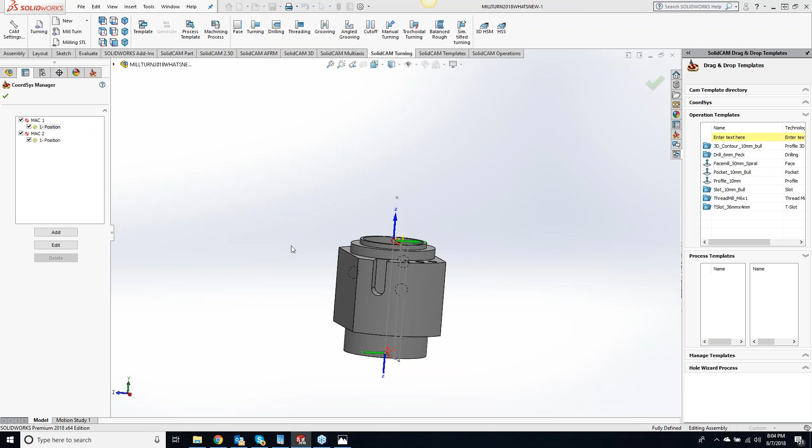So I've got a coordinate system, one on each side here, and this is going on an Integrex machine. So here's my op1, and then op2 will get transferred over to the sub spindle for you guys. So how do we get that set up, letting the machine know and letting the SolidCAM program know that it's working on the main spindle for op1 and the sub spindle for op2? Well, let me go to my fixtures here.

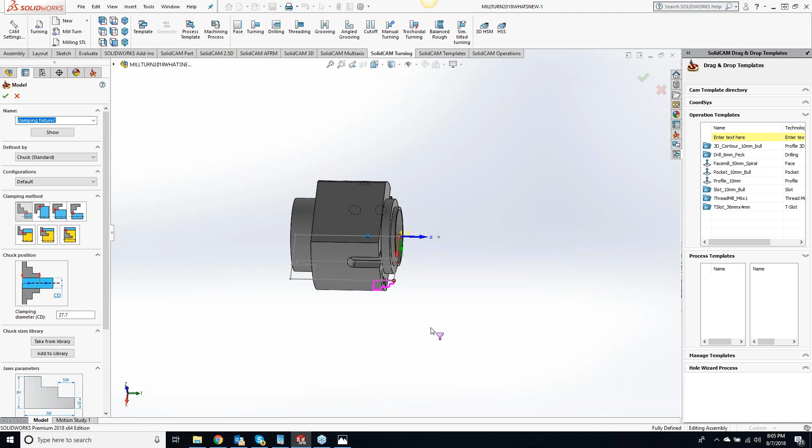Before, we used to have a distance down here for where you want those clamping jaws held on the part. It used to be right here, and they've taken that out and added it into the setup for you. So you can see my jaws are right on the edge of the part, but obviously that's not where I want it. I want it hanging back here. So what we've done is incorporated the fixture along with the setup and the machine.

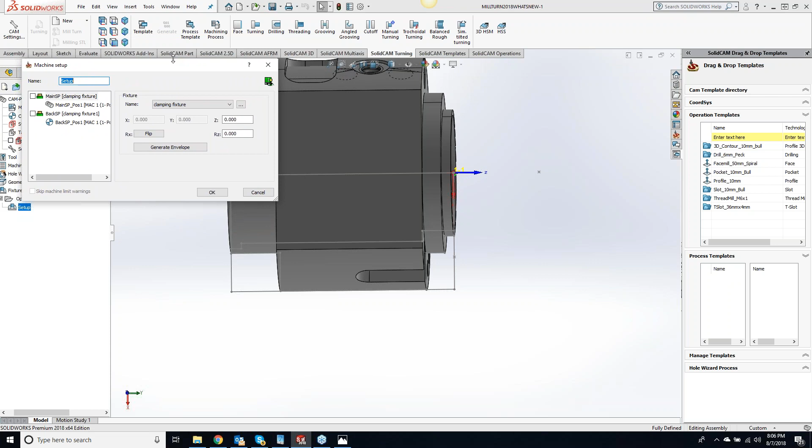Okay, if I haven't confused you yet, I'll show you what I mean. So here's the new setup. It looks a little different than 17 and 16, but it's very easy to use. First thing I like to do when you come into your machine setup is turn on your machine. This will allow you to see your part, the machine, and everything going on.

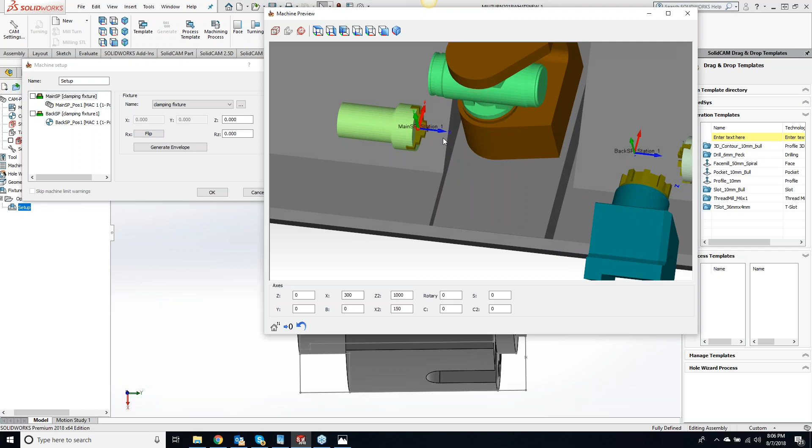So for our first one, we're working on the clamping fixture. Remember how we couldn't define where it was clamping onto the part? Let's zoom in here and get a straight down view. And here is where I can adjust where those fixtures are located. So if I just highlight that and roll my center trackball...

You can see the clamps coming out from the jaws of that machine. I'm just going to keep going here, and get them flush or close to flush with my jaws. I got a little delay here. Okay, so now my clamps are flush with it.

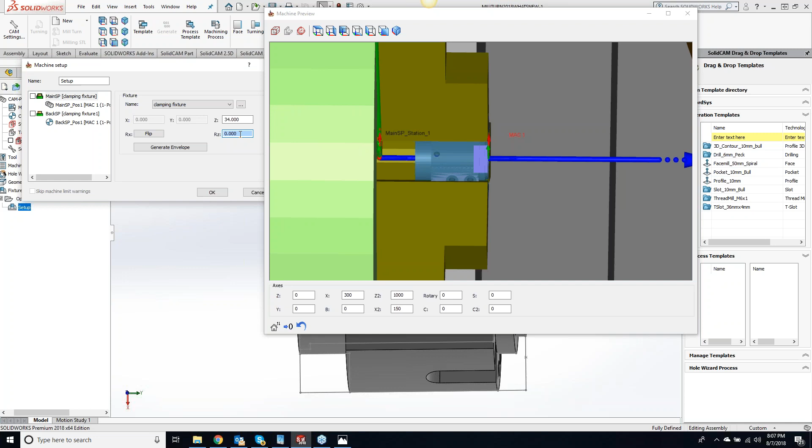And you can see I'm clicked on my clamping fixture right here. Now what I want to do is line up my jaws. So I can come down to the rotational here and rotate my jaws so they're lined up with the jaws of the machine here.

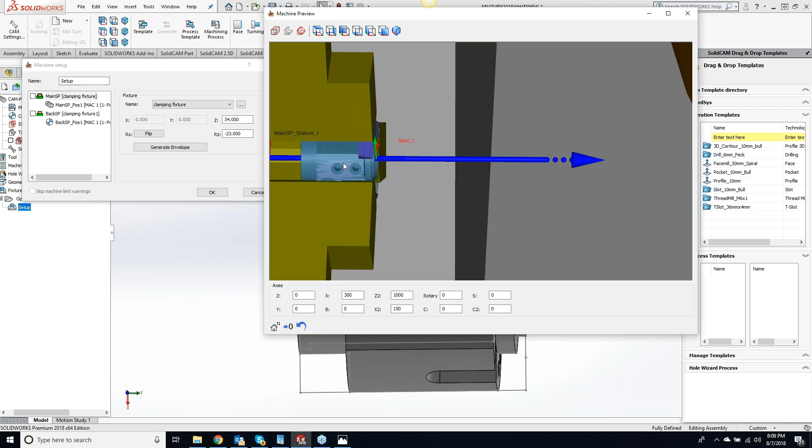Either my trackball is really slow or come on. Yeah, if you know the angle you're looking for, you can also type that in as well. Suppose I could just type in, probably wouldn't be 45 degrees. All right, that looks about good.

So now we've got our jaws completely lined up with our jaws on the machine. So now we can come over to the main spindle here, and now I can tell it how far I want that part sitting out.

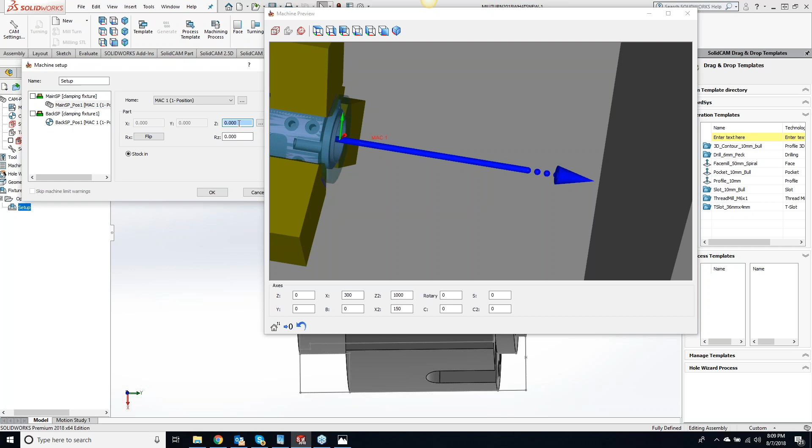Oop, going the wrong way here. So now I can come in here, and this is where I'm locating my jaws, kind of where it used to be in the fixture before, and where do I want to clamp onto that part. And we'll go right to the edge, right there. Oh, one too many.

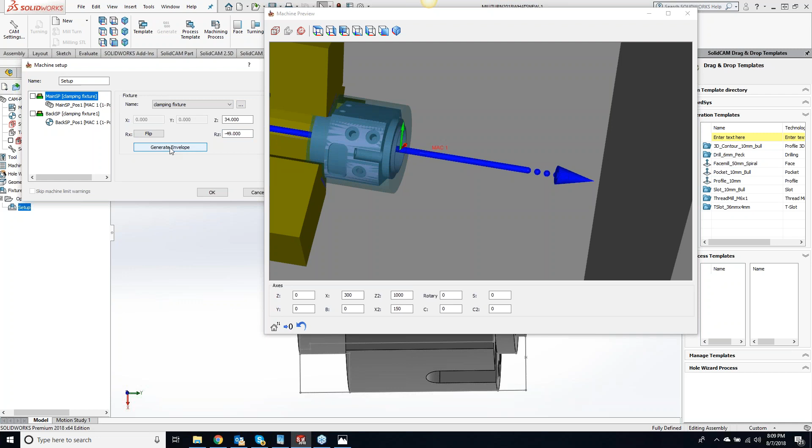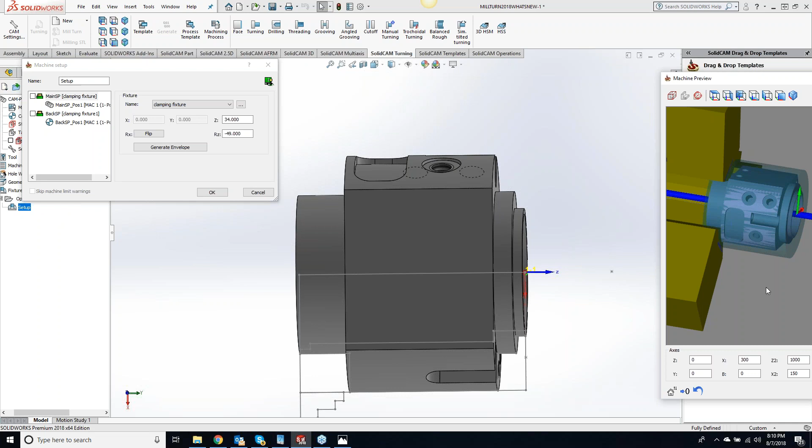Now, if you click generate envelope, what this is going to do is generate an envelope. Let me bump this over to show where that clamp is. So if we do generate envelope, now you can actually see where that fixture is on your 3D part, and you don't have to go into the setup to see where you're clamping onto, or the machine sim, or the Solid Verify.

Okay, so now we've got our Mac 1, or our main spindle, set up. So now we want to do our sub spindle. You can see over here I have a back spindle, and these are automatically created because I've got two coordinate systems, and it knows that anything with Mac 1 is associative to the main spindle, and anything with Mac 2 is associative to the sub spindle.

Now, if you guys have to do rotations, it would be Mac 1, position 2, position 3, and so on and so forth. Same thing with your sub spindle. If you need certain positions to do these holes right here, that would be a sub position for you guys.

Okay, you're going to assign a Mac position to each spindle. So now we have our back spindle here, and it had me build a fixture already. This is just a setting in your guys' SolidCAM settings to add that in there.

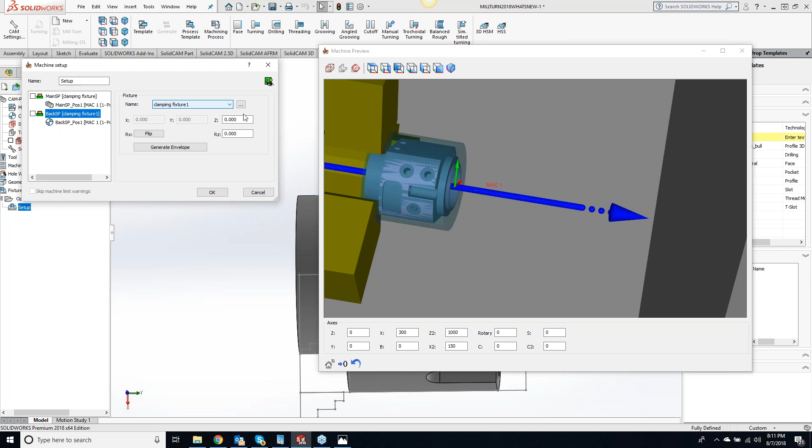Now if I go, so now we're on our back spindle. You can zoom out here, and let's go over to our back spindle. Well, I'm not seeing my part there. Come down to where the part is and click in stock. So now I can see I'm quite a ways off here. Also, my coordinate system and my jaws are actually facing the wrong way, so I can just do a flip.

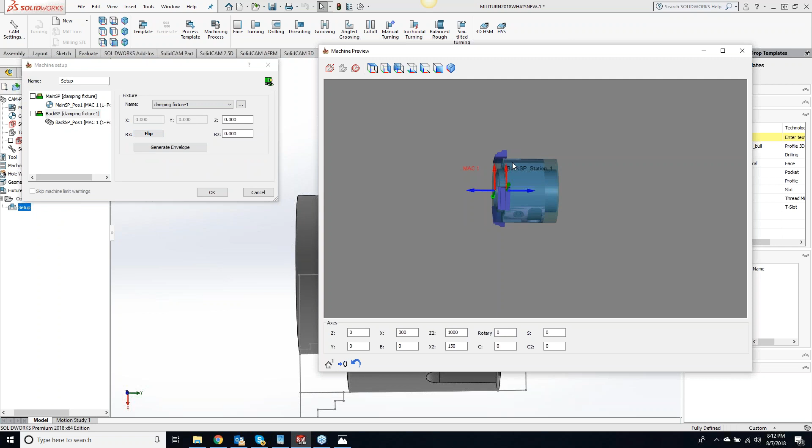So now I got my clamping fixture flipped around, and now I need to get those fixtures lined up. We're quite a ways off here.

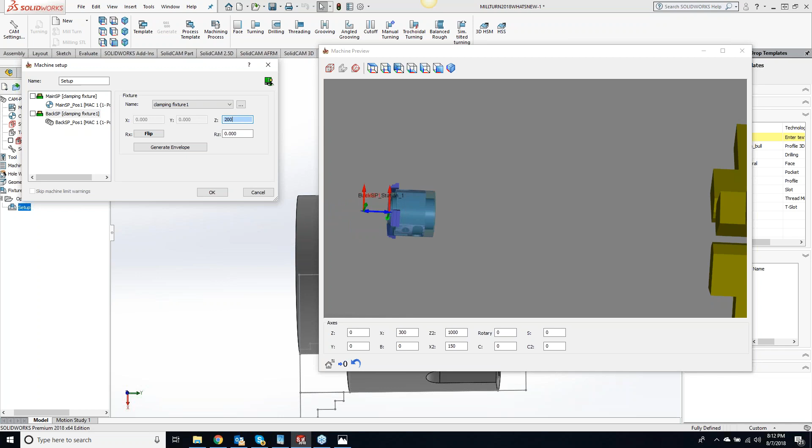I just type the number in. I just got to see if it's going plus or minus here. So we'll just do, say, 300. Gets us close.

Have you done this before, or was that a lucky guess? No, that was a lucky guess there. Because if that's a lucky guess, then I want some lottery numbers from you as well. Yeah, but here's the kicker, you win the lottery, still have to help with night classes.

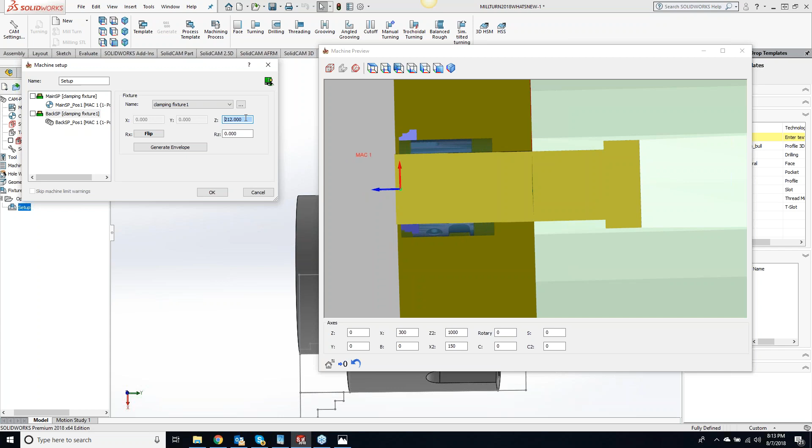Okay, so now we got, let's say I had it. There we go. Okay, so now I'm going to rotate my vices.

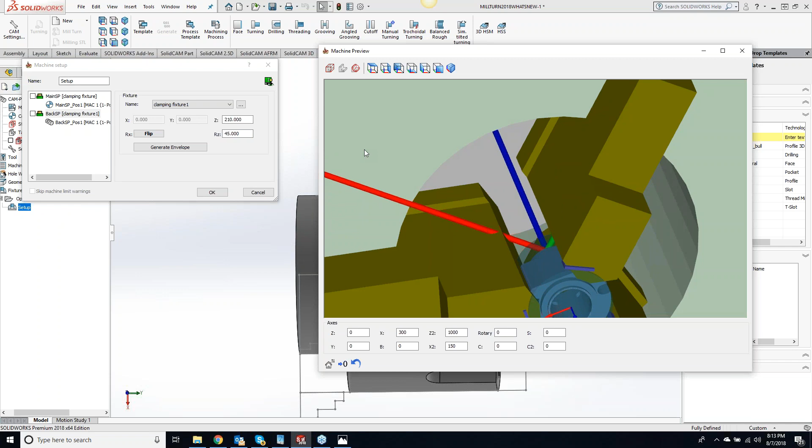I'll just do -45. Nope, +45. And I can get this fine-tuned even more, if you want to be right dead center.

Come on, mouse. Okay, so now we got everything kind of set up exactly for the fixture. So let's do our part.

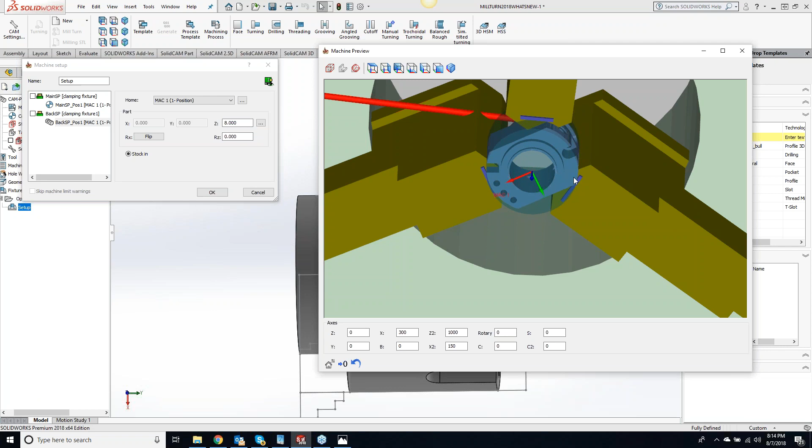And since on that back side, the only thing we really have to do is just clean off and face off, so we can call it good right there. So we're just coming right up to this piece right here, so that should be good. And that's it.

Simple as taking, for your clamping fixture, getting that aligned up, just put your numbers in there, and that's your fixture, like your 3-jaw vise or your 4-jaw, getting that aligned up in the Z. And then also if you want to rotate it to line it up with the chuck jaws right here. Now, the main one down here for the Mac 1 POS one, that's how far your part is protruding outside of those vices.

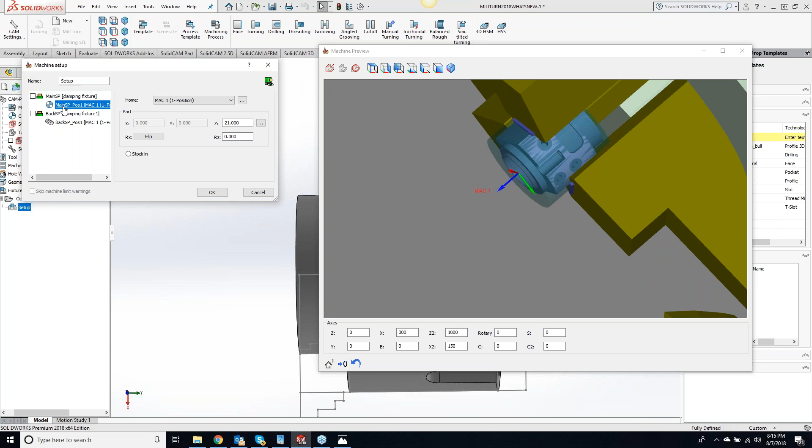Now, a little bit of confusion is, what is in stock? Basically, the in stock, all it is, we're telling it where do we want our stock. Do we want our stock in the main spindle, or do we want our stock in the sub spindle? Just for this. So if we hit OK here, you can see that I got my jaws down here.

If I need to go back in there, maybe I want to generate the envelope for that second one as well. So you can see my jaws are right there for the second one.

Pretty simple, easy. I guess, what do you guys think of the new setup?

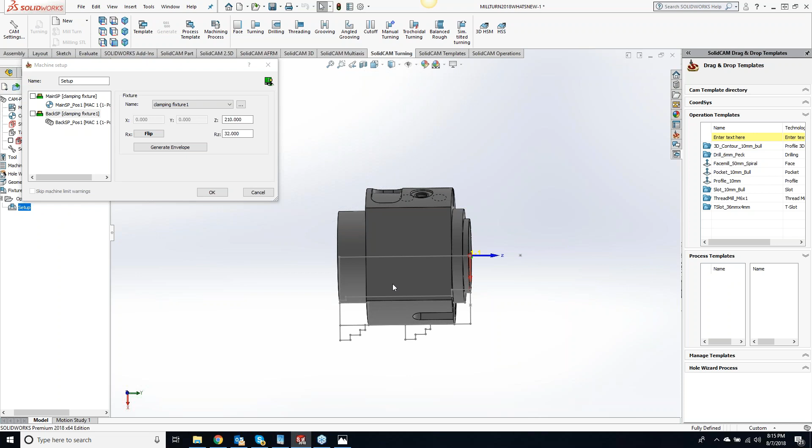Is the part reversed? Yeah, I'm seeing, let's see, Ryan, because you're saying the jaws are backwards? Yeah, I'm seeing that too here. Let me take a peek.

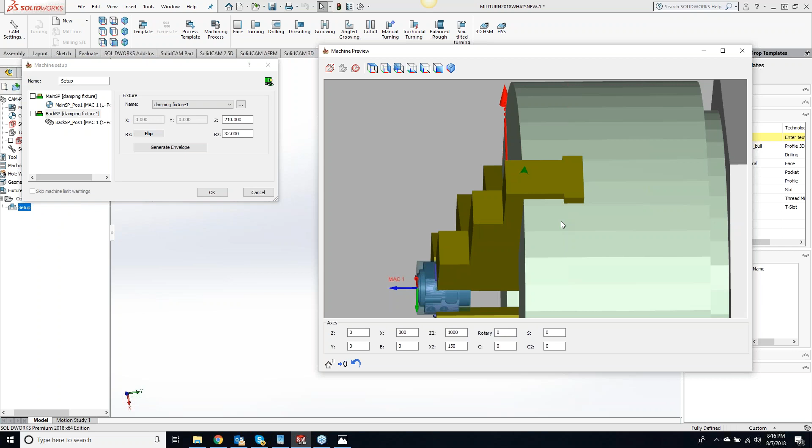So go to the clamping fixture. I got to kick it out so I can see the... no. Why is that generating the envelope? They're showing them in relationship to the coordinate system that you're using for Mac 2.

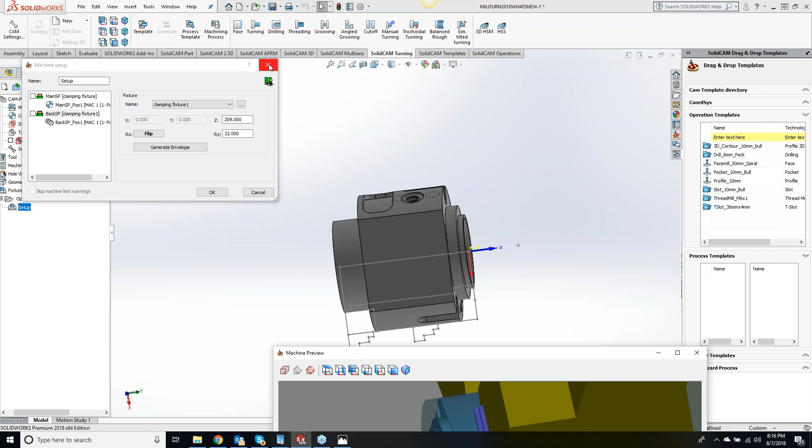Oh, so if I had Mac 2 showing right now, you're saying? Then this would be flipped? No, your Mac 2, the Z-axis is aligned in the same direction, which is consistent with how the jaws are displaying. So if you had the Z-axis flipped 180 degrees on Mac 2, that's where it was pointing into the spindle. Right now you have it away.

Gotcha. So let's do edit. And also in the setup for the sub spindle, you still have it tied to Mac 1. Set revolution. Change to opposite. Flip around Y.

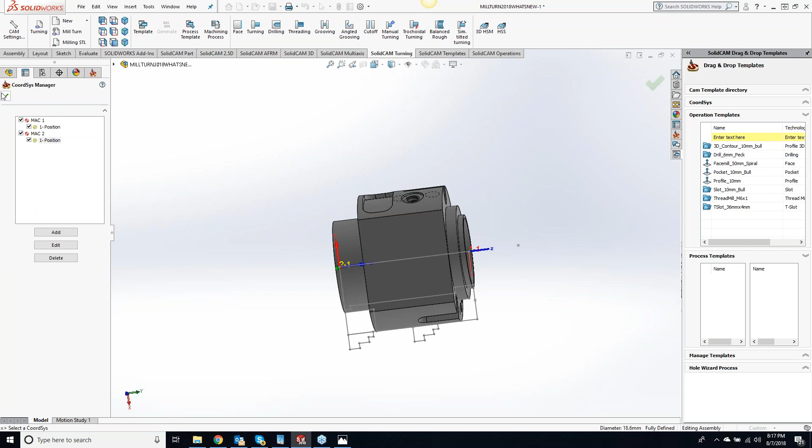And that's why we have Greg in here, keep me straight. All right, so I'm going to... oops, don't want design cam.

Okay, setup. Oh, yep, that's why. All right, so let's just take a peek and make sure everything's.

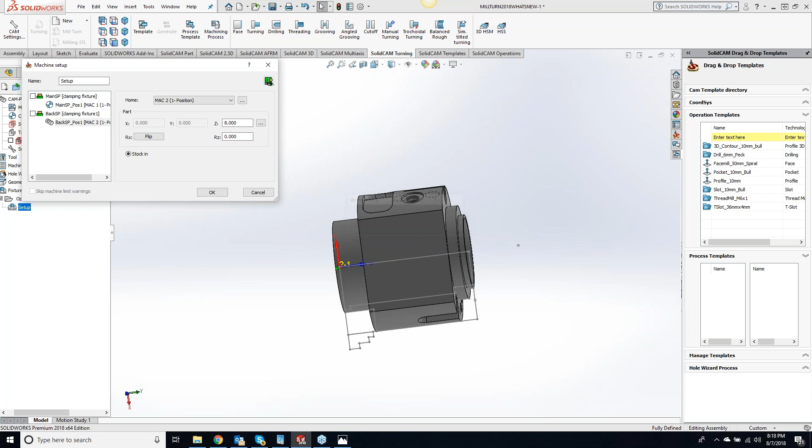Probably take this moment to explain that we can pick the Z values for where that part's going to stick out in those jaws as well, by clicking the 3 dots next to the Z. Okay, let me get this part back where it belongs here.

Okay. I think your part's flipped. There we go.

Yeah, the pick Z will be good because Ben was asking about a way of speeding up the positioning as well.

Oh, so pick Z, are you saying? Yeah, where you're picking it on the model itself. Yep, so that way you don't have to use your thumb wheel. And if you're trying to, yeah, great point. If you guys are trying to go off an exact point, that's definitely the way to go.

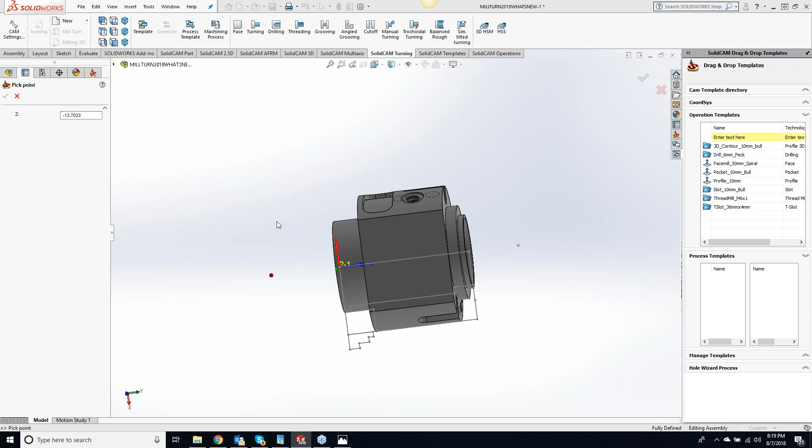So just click the 3 dot button, and let's say I want to use this exact point as where my jaws are going to clamp onto. And then everything updates to that -13.7033 for you guys.

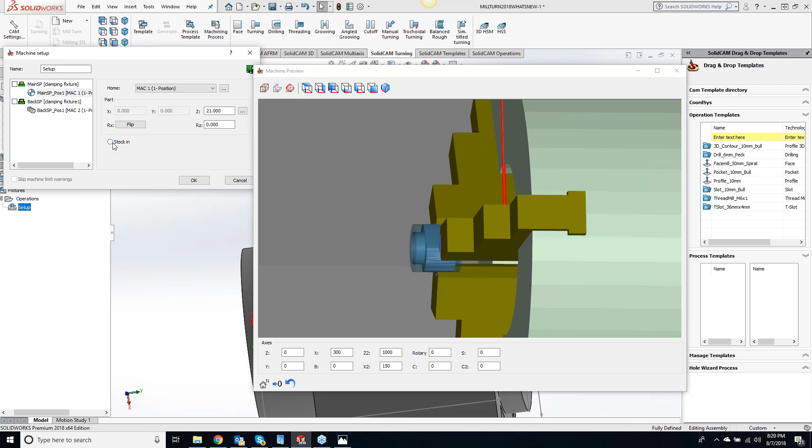Okay, show the main spindle, Ronnie says. So let's go to main, in stock. What are you looking for, Ronnie? Okay.

Now, that is the basic of the kind of what's new with the setup of everything that's going on with the MillTurn. Nice to be able to see visual in there. Everything's kind of combined into one area. So instead of setting up your fixture, putting it on the part, then going into your setup, and then changing that location as well, it's all in one area for you guys to simplify things. Kind of keep things simple and easy for you guys.

So, any questions with the setup? Okay, I don't see anything.

How many of you guys want to see a really cool MillTurn machine? One that probably you've never seen before, but okay. So, well, let me ask you this.

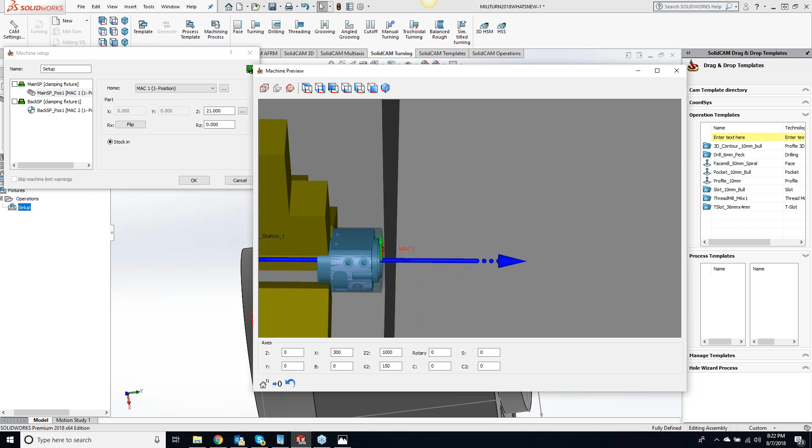If you guys are planning on going in the beginning half, it's not going to be as good as the second half, because both Sydney and myself will be there the second half. Okay, both SolidCAM professors in one room? Yeah.

Okay, so the machine, I got Greg pulled it up on his computer. This is the machine that is actually going to be in our booth, or one of the 3 machines that is going to be in our booth at IMTS for you guys. So, Greg, I'm going to switch it over to you. And this is pretty cool stuff.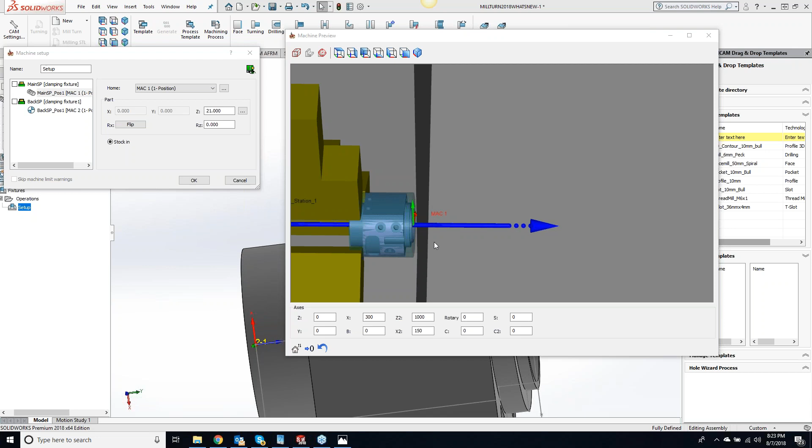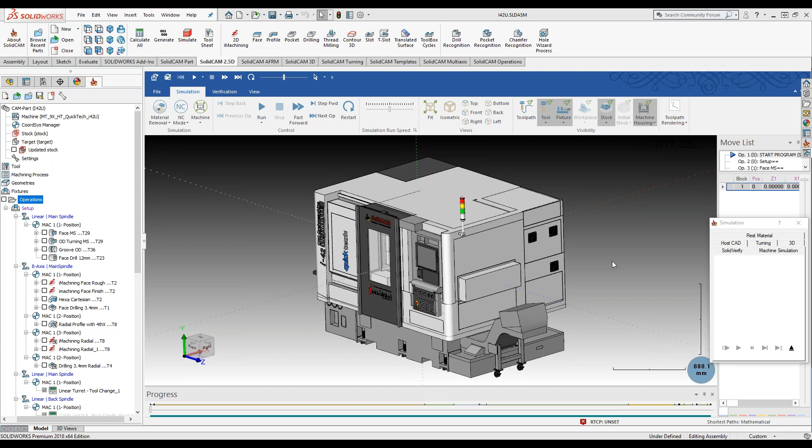All right, let me know when you can see me. Yep. So this is, all right, this machine is going to be... No, go ahead, Kevin. No, this is just, I'll drive. You can navigate. This is a Quicktech machine. The actual model is the I42U. This is pretty close to Swiss.

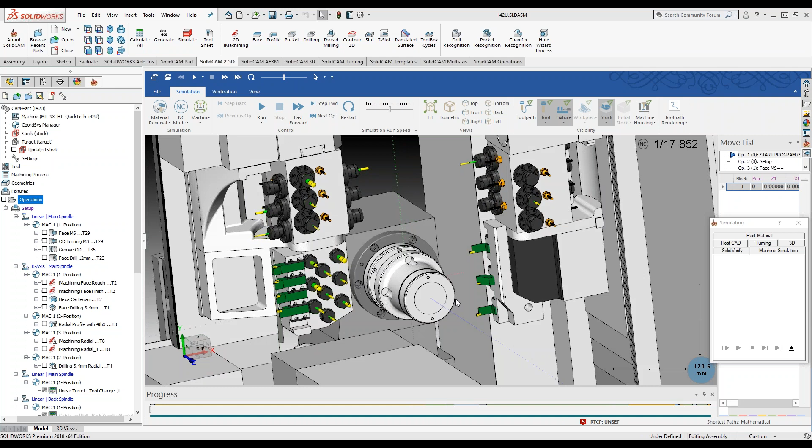And the only reason I say that is, take a look at that tooling. Now, this machine vendor, they do sell quite a few of these machines, but they could not find a post-processor to support it, or a CAM software to support it. This is one that we took on here, but you can kind of see how everything's kind of set up. So...

What axes is that on the, I guess, the back there, Greg? Is that the... Well, let me go through the kinematics of this thing. Yeah, there you go.

Let me break this out real quick, so we can see what's going on.

As you can imagine, we've got our x-axis on the main spindle, a y-axis on the main spindle, and a z-axis on the main spindle. So that's going to control these static tool holders down here.

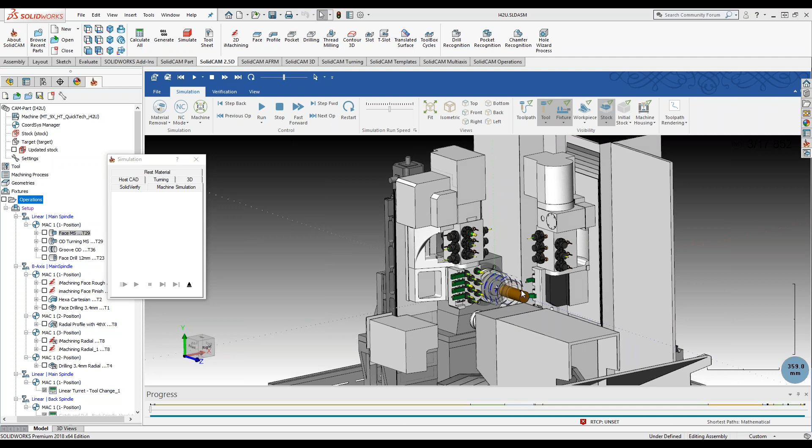Now these tool holders, if you can see, we've got them extended out radially, and I'll swing around here and get in. But you can see that we've also got some axial tools in here as well that are going to be static tools.

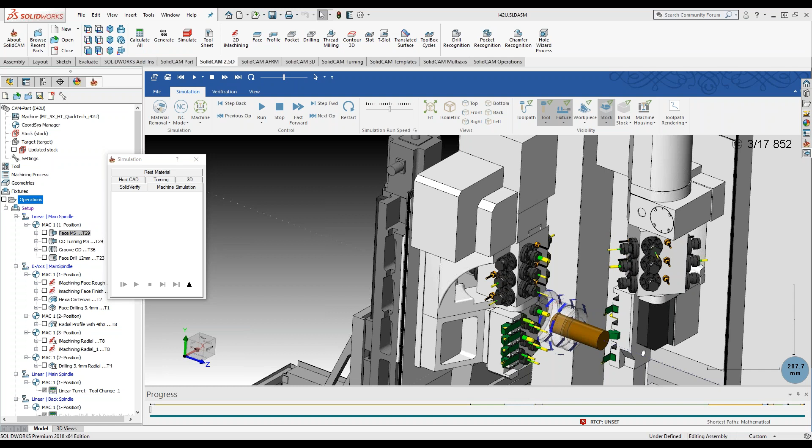Now for any driven tools, we have a B axis up along the top, and that B axis can be rotated indexially and used simultaneously to perform milling cuts as well. This is consistent across both sides of the machine.

So we've got our main spindle and our sub spindle as well. We can watch it run through some operations. Go ahead and speed this up.

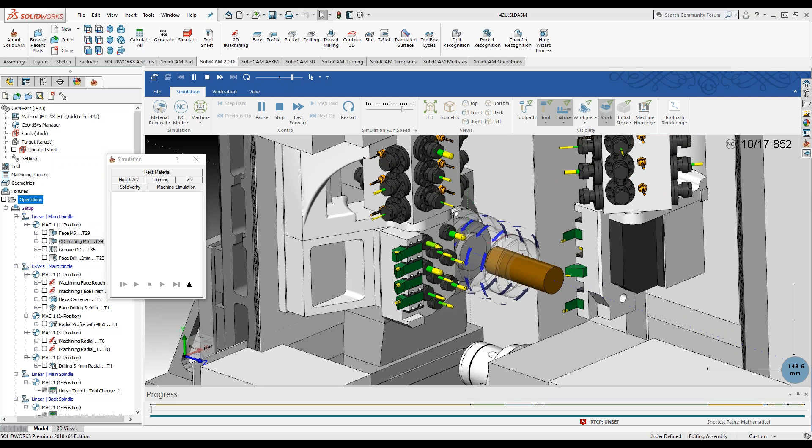That upper is your live tooling, and that lower is, like Greg said, the static, which is not moving, it's just in a chuck. So those drills that are in there won't be able to spin.

Now this machine, you can see that we've got quite an assortment of tooling that we can use across both sides of this gantry style tool holder.

How many tools does that machine hold? Oh, that's a good question. Let's see, so we got 1, 2, 3, 4. I think we're up in the 30s. 30s, okay.

We will be doing, like I said, running a pretty cool part that pretty much all of us had design intent on and programming, but if you guys hit our booth at the right time, you'll be able to take home some pretty sweet desk art.

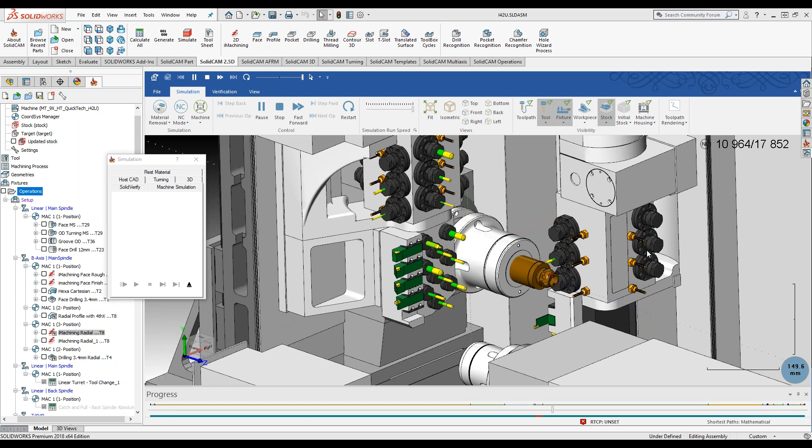If you guys think about it, all the different actions that are going on here, this is just basic MillTurn, what's going on here, but it's the kinematics of the machine, and then the post processor is what really makes these things move and do what they're supposed to.

And so getting this QuickTech in our booth, it's kind of something different you don't see on a day-to-day basis. Everybody's got the Integrexes out there, or the Okumas, or all those MillTurn machines, and this is something a little bit new that I've seen with all this kind of gantry style tooling in here. It kind of reminds me a lot of the Swiss style.

Yes Ben, to answer your question, this exact machine is actually going to be at the show. This isn't the part that we're going to be cutting though. We're going to be cutting something pretty cool. What do we tell them, Greg, or should we just let them see it in person? Yeah, let's save it for the show. If we need to, we could revisit it afterwards, because it is going to be a show special.

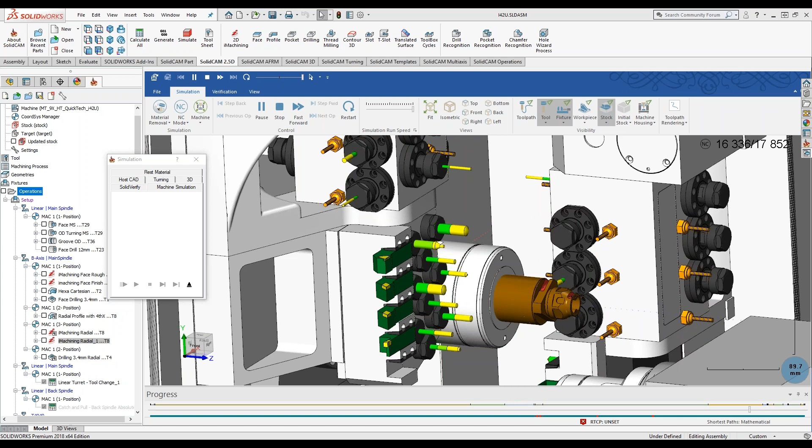Machine price tag? You'll have to talk to the QuickTech guys at the booth there. I have no idea what these things go for. Let's do it, Greg. I don't know offhand, I've only heard it's sub 200,000. Now, is this a German machine? Taiwanese, Taiwan, okay.

So you can see now we did a part transfer, or it's doing a part cutoff and transfer. And now technically that main spindle could still be running while the back spindle is going, correct? Yes, that is correct. So really kind of meant for high production machining here.

I just want to show you guys that too. There's not a whole lot new with the MillTurn.

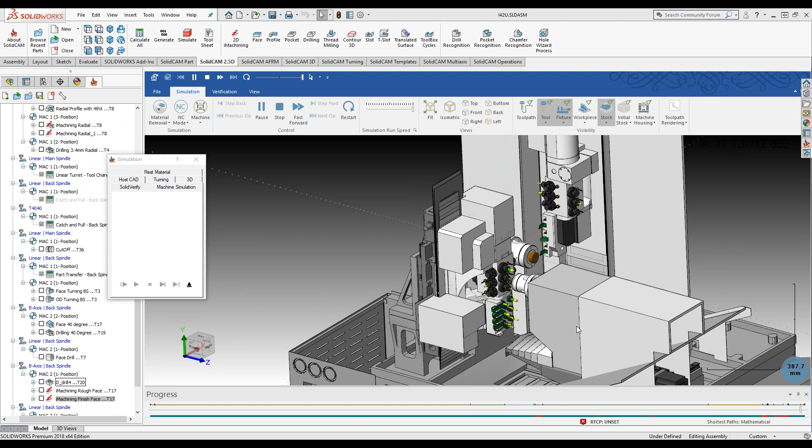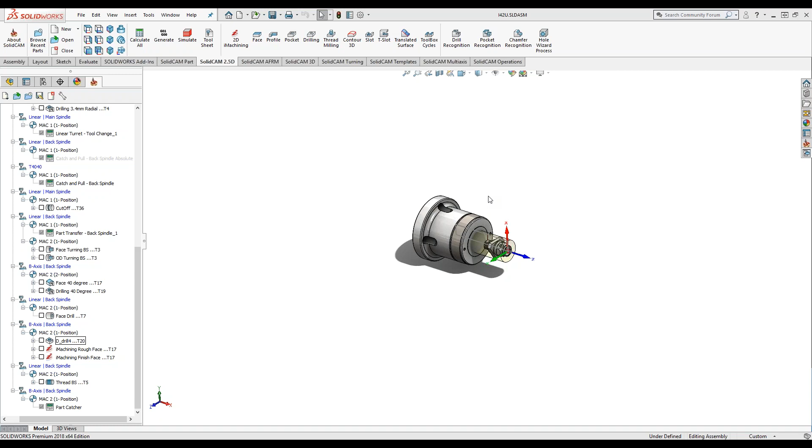Since we brought up the milling side of things, the drag and drop is going to work just like what we showed with the 2.5D. The iMachining is all going to work. So it's hard, I hate to say there's not much new with MillTurn, but there is, just because they've added so much into the milling side of things. Like I said, with the drag and drop templates, with the improvements with iMachining, all that stuff is kind of piled in onto everything here.

So the biggest thing is that setup. I got a couple calls saying, this looks completely different, what am I doing wrong, I can't figure it out. So hopefully that goes through with you guys in great detail explaining what's going on.

Some iMachining on a Brother or Robodrill might be good to show for demo 2 since they have it. That 1G acceleration, those things haul. I know the Makino's got pretty close to that too, those A51s.

How did we get hooked up with QuickTech? I think our German team had a machine. Greg, do you remember it all? I don't remember the start of the conversation. I know we worked hand in hand with QuickTech to develop the post-processor for this machine, but I don't remember what the genesis of it was.

Each year we have a different machine at IMTS. We had the Hurco, we've got that little Defiance machine. We're also going to be bringing, oh man, I had a brain fart, it's not the Defiance machine we're bringing, it's the other little one, the LaVille. Ronnie, I know you had a little bit of interest in that Defiance machine, this LaVille machine is pretty much the same thing. It's got the same motor, same spindle, pretty much the same footprint, for making any parts basically the size of a Haas desktop mill that we'll have at the show as well.